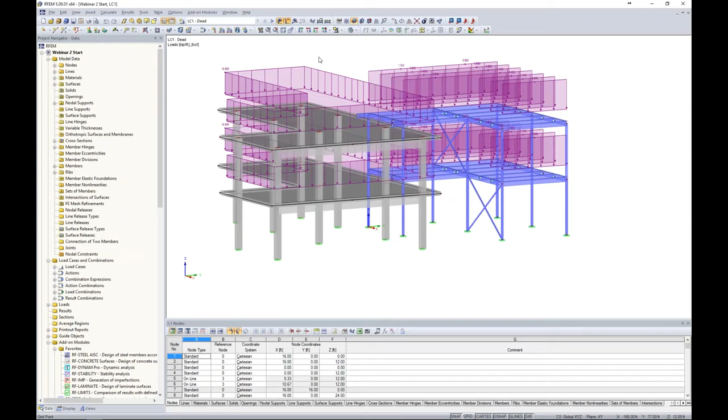Previously we loaded the structure, ran our load combinations, and got a full analysis. Now that isn't always the case. Sometimes we go to run an analysis after loading our structure, and for example, we have loaded our structure with dead load here. Previously everything ran great, but as we know with any finite element software, that doesn't always happen. So when we go to run this first load case, running according to a linear analysis as we know from RFEM Webinar 1, we immediately get an instability. Instabilities are nothing new despite what program you're using, but I want to show you these features that make our lives a little bit easier within RFEM.

The first thing to know is the text about the specific instability. It says this model is unstable. The instability is found at FE node number 64, direction Z. So it immediately gives me a location and tells me that there's some type of issue in the global vertical direction.

The model is statically underdetermined. So when I close out of this error message, you'll see that my big red arrows show me exactly where FE node number 64 occurs.

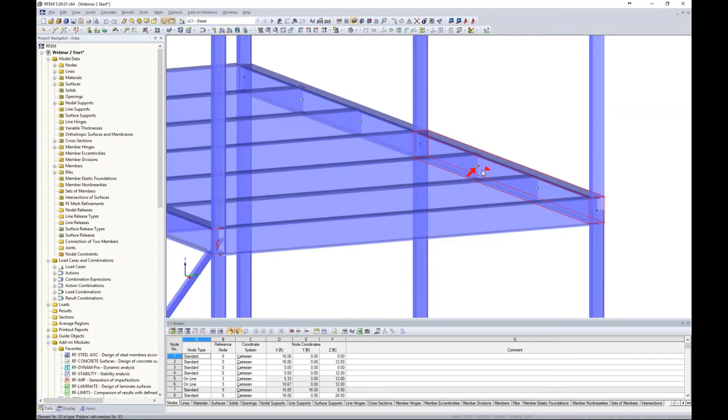I'm not going to say that 100% of the time this big red arrow points out our issue, but a lot of the time this really is where it's occurring. When I scroll in here, I don't see anything immediately. When I turn it to a wireframe model, I can zoom in and see that I forgot to connect my node of my beam to my transverse beam. Well, that's no problem at all. I can just drag and drop to connect those two members.

So you can imagine that when we have a huge model with a lot of members and we get this error message for an instability, that red arrow is a huge benefit to narrow down where that issue is occurring rather than hunting for a needle in a haystack trying to determine if a node isn't connected someplace. Now we can go and run our load combination again, or this particular load case.

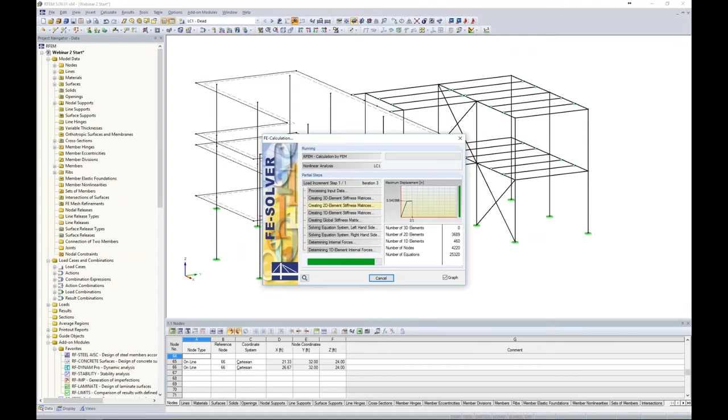We run it. Everything appears to run okay this time. We immediately get our deflections here, which we can decrease the deformation factor for. That's great, but now we need to run our first load combination, 1.4 dead load.

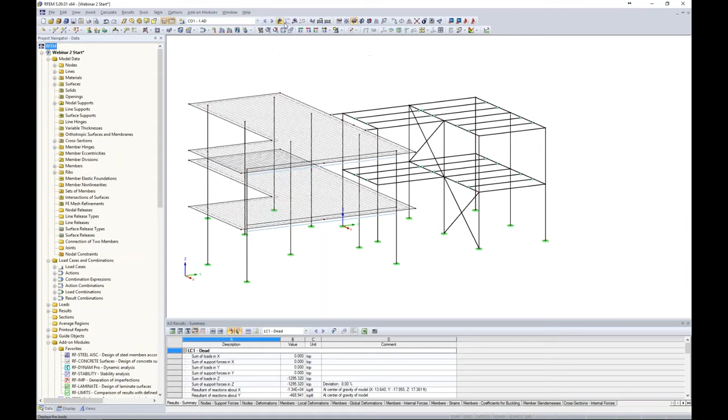This is just a load combination from the ASCE 7. I take a look at my applied loads - it's applying that 1.4 factor to all of my dead loads, our surface loads and line loads here. Turning this back into the rendered view, I begin my first load combination analysis.

And lo and behold, we get another error message - another instability, but this time the text is a little different. It says our model is unstable and the instability is found at this location, direction X. So we have a different direction being affected now. But it also says a specified load is greater than the critical load, which tells me that at this location I probably have some type of buckling issue because the specified load exceeds the critical load.

I can close out of this error message and zoom into this big red arrow here. Maybe I turn this into wireframe - I see that everything is connecting fine. So I don't really understand where this error message could be coming from.

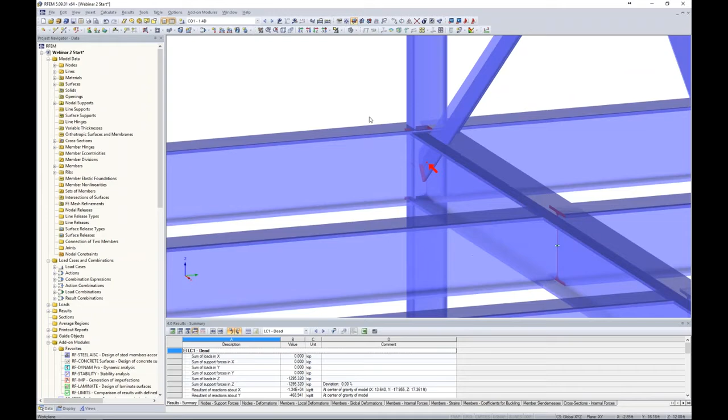This is where we can utilize our add-on module RF Stability. From our long list of add-on modules over here on the left in our project navigator, we can launch RF Stability. This is a simple dialog box that pops up within the program, and it allows us to do an eigenvalue analysis for a few different eigenvalues based on the buckling behavior of our structure. What we can do is import different axial forces from either load cases or combinations.

Now, because I was able to solve for my first load case, dead load, just fine, it makes sense to import those axial loads to see how the structure behaves based on those applied axial forces. We have quite a few other settings here that I won't get into in too much detail, but we do have an option to calculate an eigenvector for an unstable model - this is if I couldn't get the model to solve at all, so the causes of the instability can be checked graphically. This is a feature too if we couldn't even get our dead load to solve.

Now for this, I will run the calculation and it quickly runs the different 4 eigenvalues. I'll now see my results available in my tables here. You'll see I have 2 different columns - the first is the critical load factor.

The critical load factor is just a factor that I can multiply that applied dead load by before I'm going to see the associated buckling behavior. We have 4 different eigenvalues, so the critical load factors are listed here in ascending order, so probably our most important one would be this first eigenvalue. Now the magnification factor is just a relationship between the moments of a linear static analysis and a second order analysis - essentially my first order moment times my magnification factor gives me my second order moment. But now we're a little more concerned with this critical load factor.

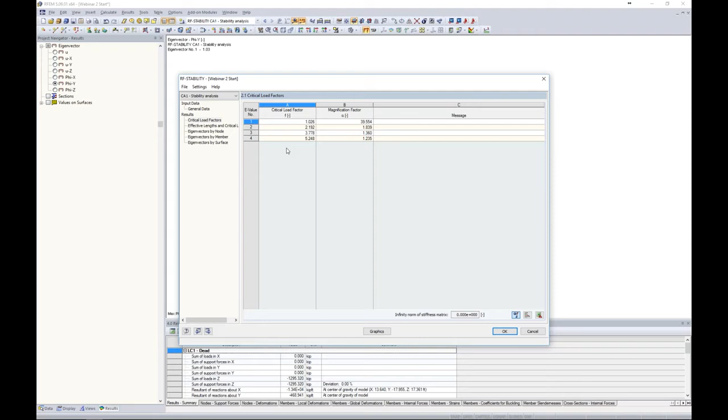So if we take a look at my graphics, we're still in this add-on module RF Stability. We can see with our drop-down box here I have my four different eigenvectors. Looking at the first eigenvector, we can see the buckling behavior of this structure.

Remember, I can only multiply my dead loads by 1.03 before I'm seeing this type of behavior. If I take a look at the other eigenvectors, it's the same type of behavior. It all has to do with these slender columns here. So when I multiply my dead load by 1.03, I see this buckling behavior, and when I try to run 1.4 times my dead load, that's where our instability is coming from. These members simply can't handle the applied loads.

Back under my Data tab, at the very top is all of my input data. I can take a look at my cross sections, maybe turn off my results here from RF Stability. I click on my first defined cross section - it's a W6x9, a very small number. So perhaps I want to increase that to something a little larger.

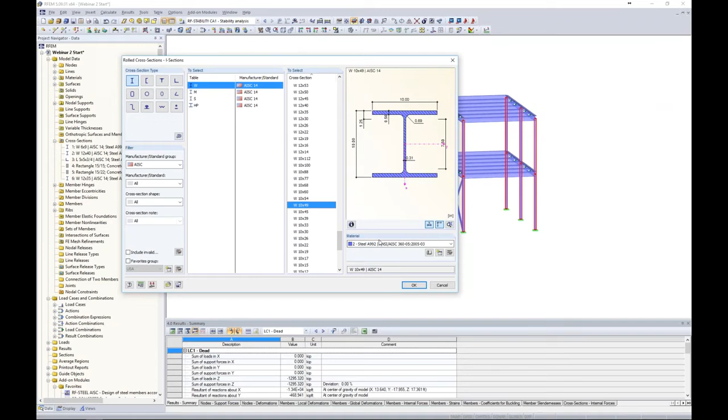I can right click and edit all of these cross sections at once because they're assigned to a single cross section within the program. I open up my cross-section database, and here are all of my AISC shapes. We'd like to choose something more like a W10x49, much bigger than a 6x9. A992 is still okay, but obviously we're going to have a bigger cross-section here. I click OK, and it's asking me to clear my results.

So now when we go to run our 1.4 dead load and run the analysis, everything should run fine because now we have a sturdier member and we don't see that same buckling behavior. You can see how RF Stability is extremely useful, not just if you have an instability, but if you want to see the different buckling modes of your structure. I did a few other webinars where I utilized RF Stability to export imperfections as well.

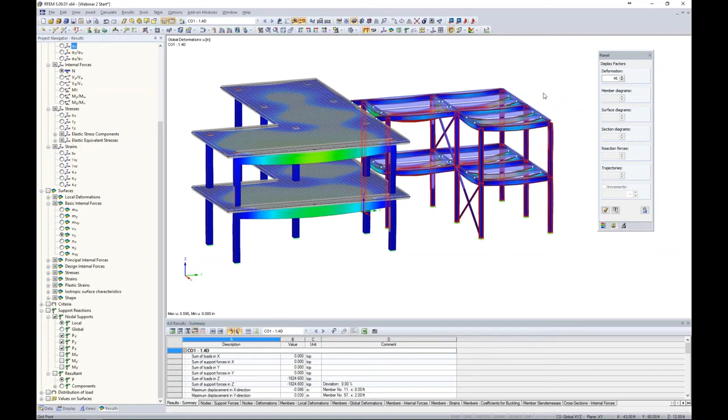Okay, so now that we've addressed instabilities, I'd like to move on to singularities. The first thing to do is turn off our results, and let's take a look at the top surface of our concrete structure. If I drag my selection box over that top surface, I can use my drop-down box here to create a visibility by selected objects.

You can always right-click and show the hidden objects in the background if you'd like, or right-click and turn that off so we get a clean view of only the structure we've selected. Under Views, I can create a new visibility, and we'll call this Top Slab. I click OK, so now I have this user-defined view under Views that I can always refer to, no matter what view I'm currently in.

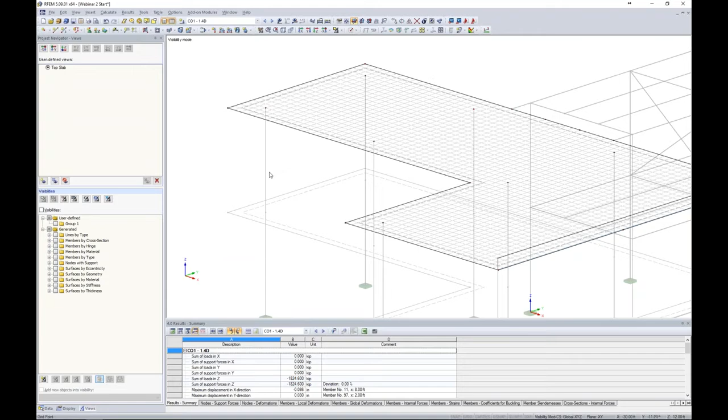So this is the case when we show the hidden objects in the background and show a wireframe view: members are always 1D elements in a finite element software, while our surfaces are 2D elements. The problem is that where we intersect this column to the 2D surface, the intersection occurs at this tiny FE mesh element, a single node point. So we can imagine that all of our force transfer is occurring at this single point.

Inevitably we're going to get very high stresses and very high forces. If we go to design this concrete slab, we're going to get high reinforcement simply because it's a product of the high internal forces at this location. In reality, when we render this, these columns are 15 inches by 15 inches, so we are going to get some load distribution. This isn't just for RFEM, it's common in any finite element software. So what tools do we have in RFEM to help us address this so we're not overly designing our structure?

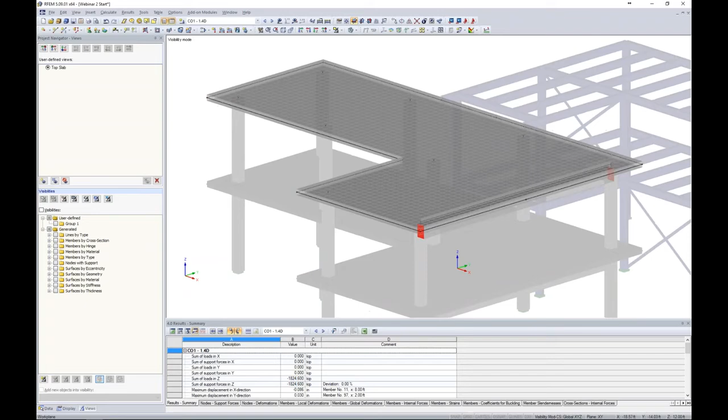The first thing I'm going to do is jump to a different model here that I have saved, where I've already used our add-on module RF Concrete Surfaces to do my reinforcement design. Now I have an entire hour-long webinar dedicated to just surface design using this add-on module, so we won't get into it today. But again, if you're interested in how we can do reinforcement design for this, refer to that YouTube video.

So once we run our analysis in RF Concrete Surfaces to get design per the ACI, we have our different required reinforcement. The first is AS1 in the top direction. Judging by this red arrow, we can see the reinforcement direction, and you'll notice that where these columns are framing into the slab, we have high reinforcement given there. The same goes for AS2 in the other direction.

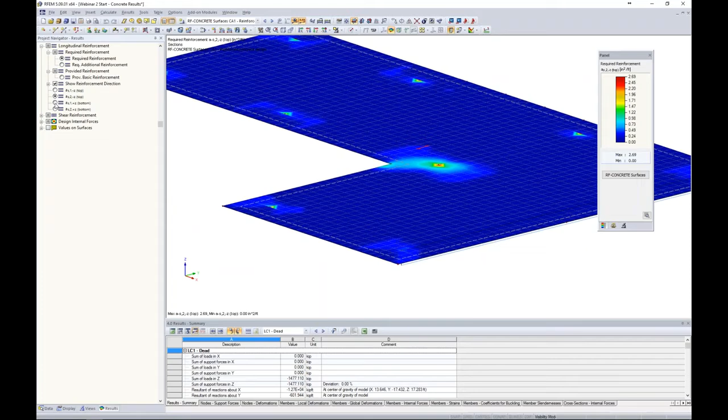Now, when we're looking at AS1 at the bottom, it's not the same, which makes sense. We have a lot of bending at the bottom of our slab between our columns, so that's where most of our bottom reinforcement is going to be. Same with AS2 at the bottom in the other direction.

Now, focusing on AS1 top for our slab with this particular reinforcement design, this is nice in terms of our contours, but perhaps we'd like to see this in a more numerical value. Well, we can do so with sections, and what we will do with our first section is up here in our dropdown, we can create a new section numerically.

But before I do that, right next to it, we have the option to completely turn off our ISO lines. So these results will still be available, but I'm just simply turning off those ISO lines for the sake of making my section cut right down through the center of my slab. So a section is exactly what you would think of it. It's going to give me the internal forces or my results at that particular location. So we can create this section numerically.

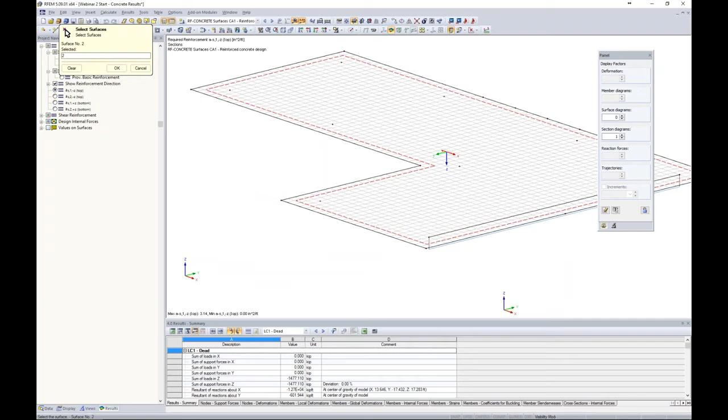Now, the first thing I need to do is to give it a section name, section 1. It will be a section cut through my surface, and I can apply this to my single surface number 2 here by clicking on that graphically. The next thing to define is my start and end points for the section.

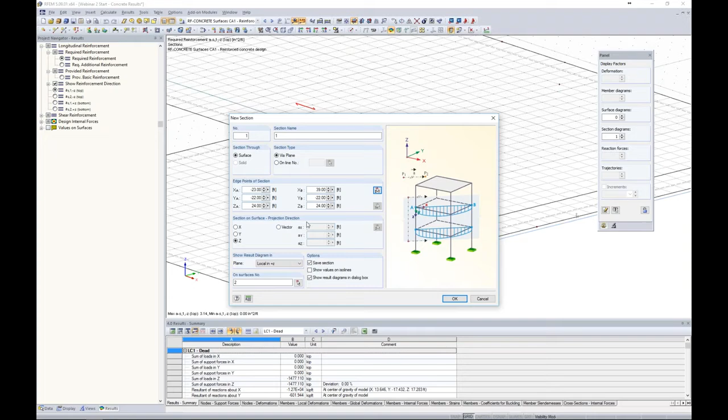So what I like to do is maybe turn on my drawing grid down here, and I can activate that down at the bottom, change my origin for my drawing grid, and I can choose my 2 points here by zooming in, and I want it right down that column line. So my second point will just be located at the second end of my slab, and because of those AutoCAD-like features, the program does a great job of just snapping to those points that I most likely would want to place my section. Now, the section on surface, the projection direction, we can have it in the global X, Y, or Z orientation, or we can define our own vector if we want it at some type of angle.

Once I click OK, then it immediately brings me into the results diagram for my section, and you'll see our exact same results that we were viewing in RFEM, and in particular, we take a look at our reinforcement design per RF Concrete Surfaces. Here are those spikes in reinforcement where our columns are framing into our surface. I think we can easily say that this is being over-designed for those internal forces.

Now, I can always exit out of here and view these surfaces, as you can see graphically on my surface as well. So going back to the results diagram by right-clicking, I want to show you guys a useful feature called smoothing ranges. Up at the top is the option to edit our smoothing ranges.

Now, my first column occurs 3 feet from the edge of the slab. My second column occurs at 20 feet from the edge of the slab, and my third at 41 feet. So what I'd like to do is smooth out the range, 1 foot on either side of the column for a 2-foot range there. So this is to account for the load distribution that's occurring when in reality the program's not accounting for that.

So what we can do is define our different ranges. For example, for our first column, the beginning will be 2 feet and the end will be 4 feet. The program automatically calculates the length as a total of 2 feet for that first smoothing range. The second will be from 19 feet to 21 feet. And lastly, for our third column, it will be from 40 to 42 feet.

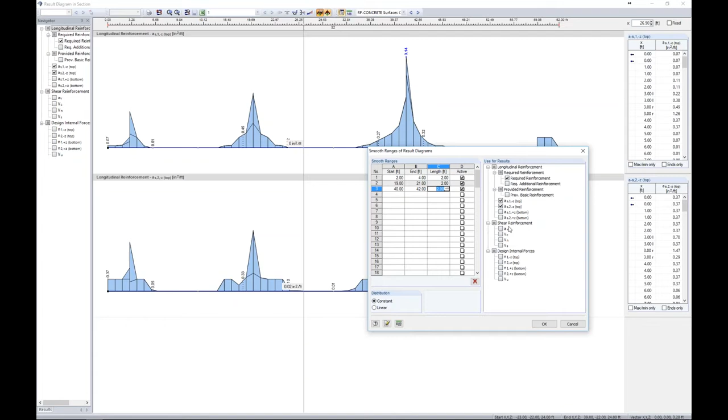The program automatically assumes that we'd like to apply these smoothing ranges to what we're currently looking at, but we can always activate and deactivate different results available here. So now when I click OK, you can see the smoothing range applied.

For example, column number 3, we went from 3.14 inches squared per foot to 1.65 inches squared per foot. So extremely useful in the sense that we can print this to our printout report.

We can even use this drop-down box here and pull up one of our other load combinations. I'm going to clear out all of these result diagrams and just activate my MX and MY. Again, we're seeing those spikes in internal forces here. I can go back to my smoothing ranges and simply activate the checkbox for MX and MY for all 3 of these ranges.

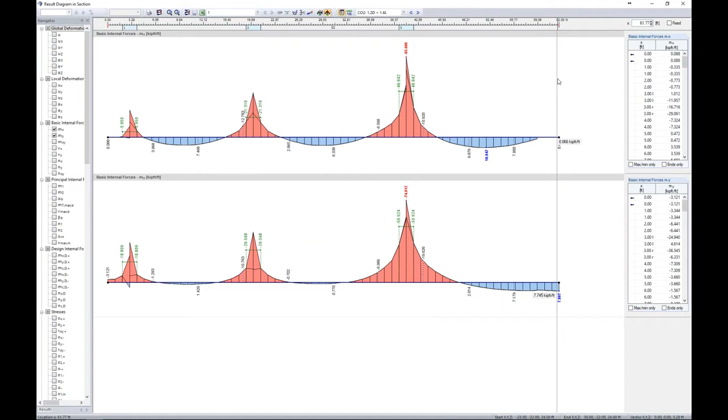So now when I click OK, you're going to see the smoothing range applied here as well. Now, one thing to note, if we jump back to RF concrete surfaces, for example, the smoothing ranges are shown here, but if I were to exit out, they are not shown graphically here within the model.

So the question is, that's great, but how can we apply this so that the program actually designs for those average forces rather than us just putting a fictitious number after our results are shown in the smoothing ranges? One thing I forgot to mention, if we take this section cut and highlight it, we hold down our control key, maybe we want to copy it down this other column line to give us some perspective on some high design forces as well at this location.

So smoothing ranges are great, but if we go back to our data tab, we will see these sections available here. We have section 1 that we just created, and here's our second copied section. There's another feature called average regions.

So if I right click, I can create a new average region. Now for this, we want to apply it to a particular surface, so I graphically select surface number 2 here. You'll notice that I have 3 different forms I can select for my average region: a rectangle, a circle, or an ellipse.

For our particular case, our columns are rectangular in shape, so it's probably most beneficial to use a rectangular averaging region. But maybe you have a circular column framing into this slab, so that can be utilized as well.

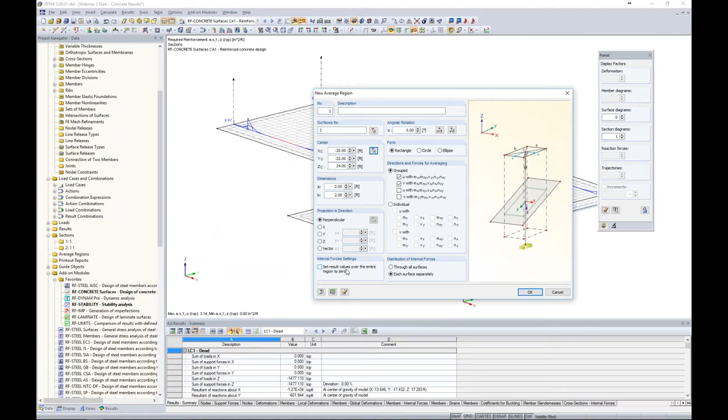The internal force settings, you even have the ability to set all the result values over the entire region to 0. This might be beneficial if we're checking punching shear for a column and we're really interested in the shear at the critical shear section, and we don't want to design for anything within that critical shear section. So if we click OK, then we will get our first average region.

Now, to make this very clear what we're doing, I'm going to jump to one of these particular load combinations, and under my results, I'm going to activate my sections. So we're still viewing our sections here, but for my MX forces. So this isn't my concrete design now, this is my internal forces MX.

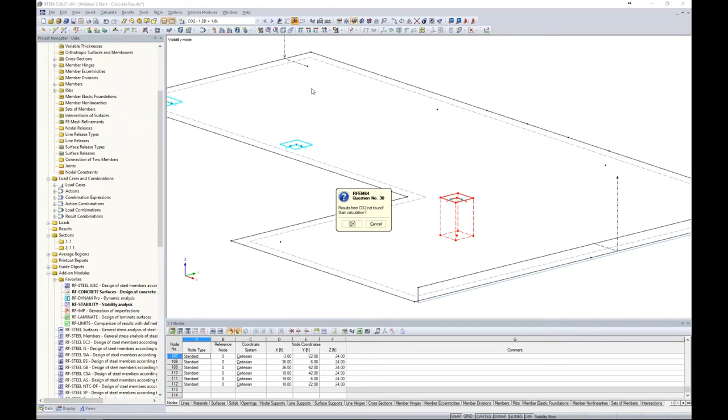Now with this average region, all I have to do is select it, hold down my control key, and then I can take it, drag it, and drop it. It's asking me to clear my results, that's fine, and drag and drop it to some other regions here. Now I can rerun that same load combination rather quickly here, and we will see that average region now apply.

Now previously this was something like 83 kips per foot, so you can understand that this is now going to give us less internal forces.

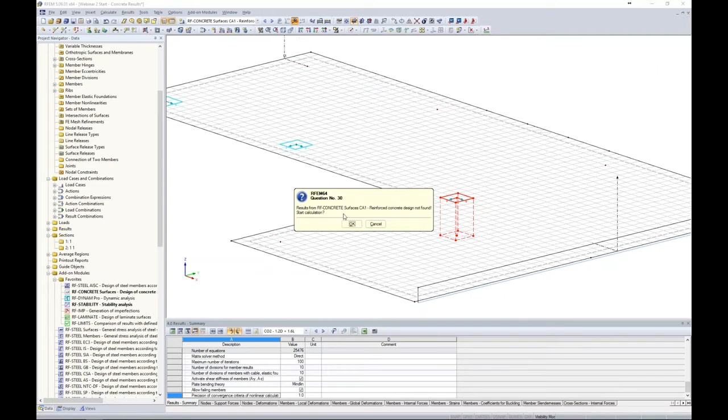Now if we jump back to RF concrete surfaces, it looks like we lost our results here, so I'm just going to quickly rerun that. All this is doing is applying the ultimate limit state designs for all my load combinations to do my reinforcement design. But what I want to show you with these average regions is that my AS1 top is still showing 3.14 inches squared per foot, so this average region did absolutely nothing to help us.

So why is that? Well, back under the Data tab, under the Concrete Surfaces add-on module—if you want a more detailed look into this particular add-on module, refer to our previously recorded webinar—but to let you know, when you are using average regions for concrete design, under the Details tab, it is default to have this option checked off.

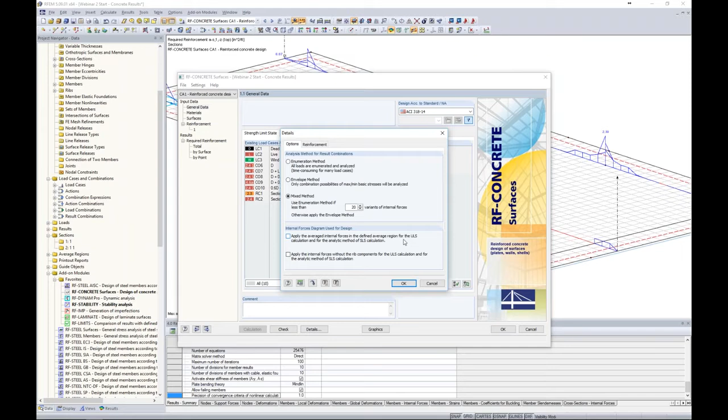What we'd like to do is apply the average internal forces for our ultimate and serviceability limit state designs, so now we want to check this checkbox. I click OK, I click OK. We've lost our results again, but we can easily run a quick analysis, which solves rather quickly, because now it's taking those average internal forces to give us our reinforcement design. So now we have gone from 3.14 to 1.83. This is how we can apply those average regions to address singularities within the program, especially for something like concrete design.

Okay, so that is what I wanted to look at in terms of singularities.

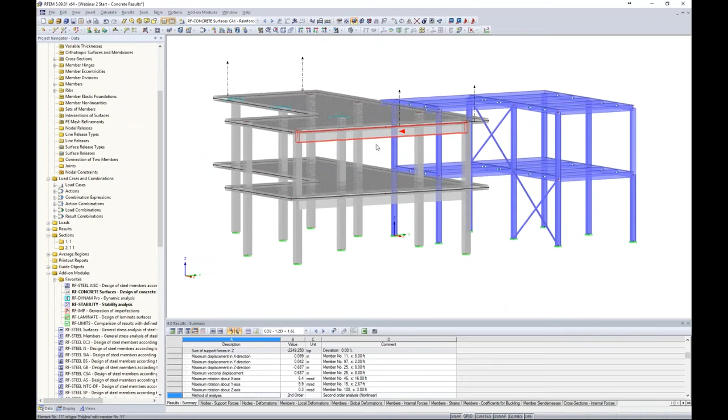Now, switching topics, I'm going to cancel my visibility mode here and render my model. In RFEM Webinar 1, if you can remember, we created this beam member here, and it's actually a rib because we wanted to span from this column to this column, but we didn't have an intermediate column, so we thought it'd be best to apply a rib member there. If I double click on this rib member, you can see the member type is set to that. Previously we had defined effective widths for this rib member to take that into account for analysis, but also designed for our reinforcement per the ACI.

Now, let's say we have a situation where we actually have a precast element, and the precast slab is sitting on this precast beam. It's not a monolithic pour like what we'd see with a rib type member, but in reality I want to fully release the moment. Maybe I still have resistance for lateral and vertical movement, so X, Y, and Z are fixed, but no moment will be transferred between the two. So what I'd like to do is not have this set as a rib, but set it to a beam member. When I click OK, it asks me to clear my results.

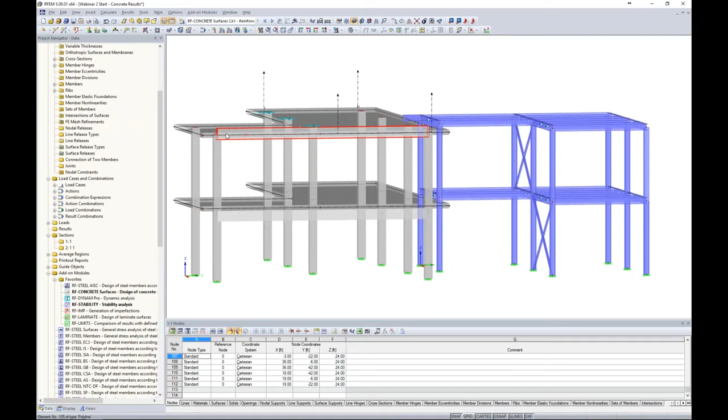My typical member is modeled directly at the center line, the same center line as the slab. But in reality, what I'd like to do is still drop this beam down below the surface. So how can I apply an eccentricity?

If I double click this member, we have a tab here called Options, and that's where you'll see member eccentricity. Now we need to define a new member eccentricity. You'll see here that we have not only the local axis system X, Y, and Z for a member, we can also set it according to the global X, Y, and Z. The local might come in handy because if we are modeling a member at an angle, then obviously we want to apply the eccentricity according to the local axes rather than the global.

Now we can also apply this movement of the beam in the X, Y, and Z, so not necessarily just vertical eccentricities, but left and right too. Typically with this situation, I would need to understand, well, what's half the depth of my slab, what's half the depth of my beam, add those together, and I can manually apply my eccentricity. But we have automatic features in the program that can do all of that for us. You can see here that I have six different options of where I can select my beam to be, for the eccentricity to be applied to. This little red dot highlights exactly which option I've selected here.

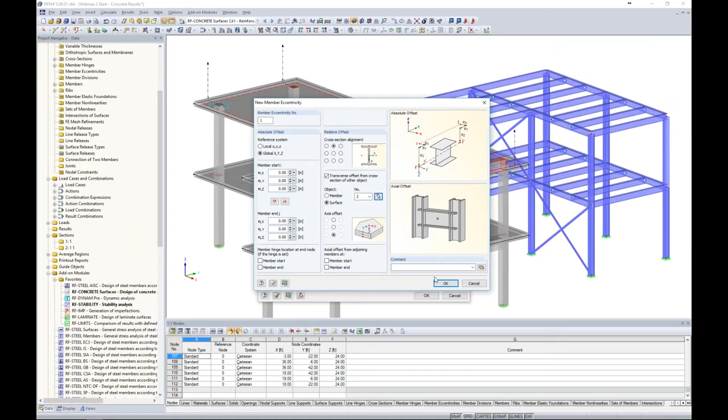So I'd like the top of my beam, and I want to offset it according to a surface. Then I can graphically select my surface number 2 here, and I want to offset it from the bottom of that slab. Now when I click OK through all these dialog boxes, we can see that beam was dropped down below the bottom of the slab. This is the same concept as the rib member, but now we're not taking into account that effective width.

One thing I'd like to do, and I created this user-defined view here of my top slab, let's render it again. What's going on behind the scenes, if we turn this into wireframe, is the program has dropped this member down below the slab depth, and it's applying little rigid links at every FE element along the member length. These rigid links have full fixity to transfer moment, shear, and axial forces, but remember, we're trying to alleviate these moment forces being transferred from the slab to the beam, causing high torsion within the beam.

So how can we automatically do this without modeling individually these little rigid links, what we may have to typically do? Well, in the program, we have a feature under data, and if I scroll up to my input data here, you'll see a line release.

So what I can do is right-click to apply a new line release. The first thing the program asks me to do is define the line, and I will apply the line that I used to create the member. If I try to click the member itself, it doesn't allow me to do that, because in reality that's not where the member was modeled—it was applied to this line integrated within the surface. Then we create a line release type.

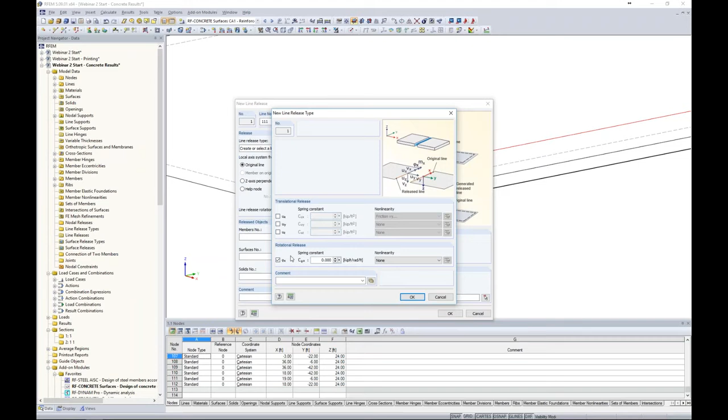Keep in mind that these are the local axes of the original line. Surfaces have their own local axes, our beam has its own local axes, and so do our lines. So we're not releasing any of the translation or rotation directions of the beam or surface, but rather the line itself. We're going to completely release this rotational release, phi x here, and we can click OK.

We do need to define which is the released object. We'll apply this to our surface number 2 again, press OK, and we'll see the setting within the program that shows us we have some type of line release here, judging by this blue symbol.

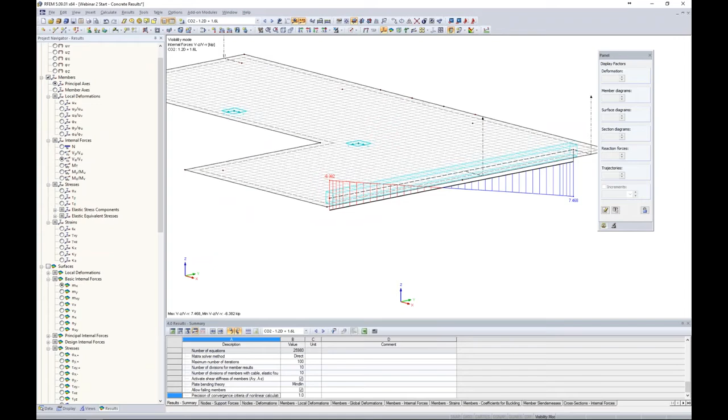So now if I were to run one of my applied load combinations, such as 1.2 dead, 1.6 live, we can run this load combination. Again, we're just viewing our initial view here, and I'm going to turn off my surfaces. We just want to take a look at our member design, so I'm going to turn off my sections.

Rather, we're taking a look at our members and our internal forces for torsion. You can see here that we still have a small amount of torsion along the member length of 1.933 kips per foot. But what would this look like had we not released that particular moment along the member length?

So this is how we can effectively apply line releases in the program, if for example we did not want to connect our surface to our beam element.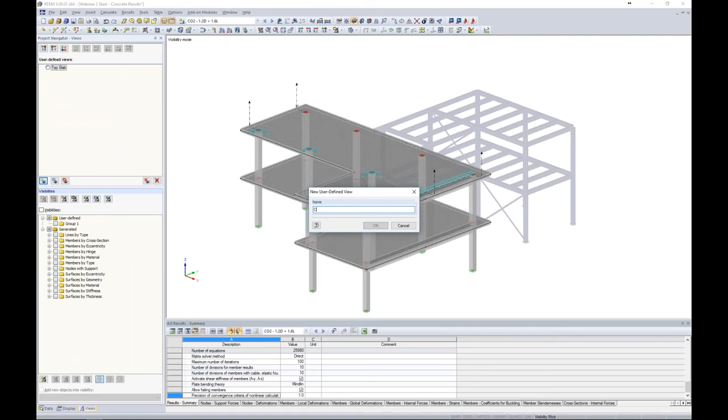So under my views, I can create this new user-defined view. We'll call this one concrete structure only. I click OK. And I'm going to turn back on my grid and redefine the origin at the base of my structure.

I'm going to hold down my control key to select these two members, and once again holding down my control key, I'm going to copy these, drag and drop them to a location parallel to the concrete structure.

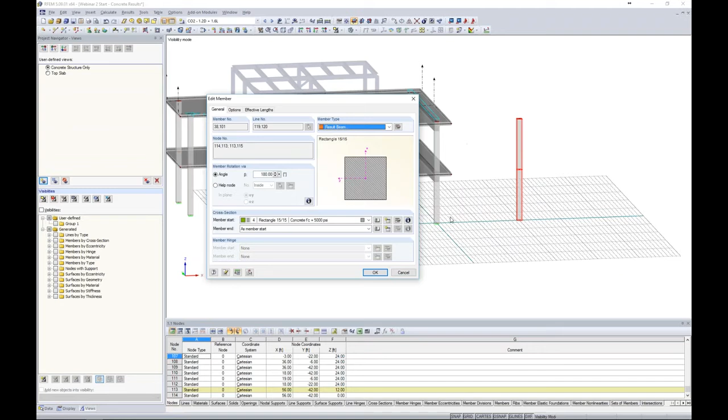So what I'd like to do from here is select these two members, right-click to edit them. Under the member type is where we can choose result beam. A result beam simply takes the information from other objects in the model and applies it so that we can view the analysis results as a member internal force.

Result beams don't add to the stiffness of our structure. We're not applying them to an analysis, it's just simply a different way to view our results. As far as a cross section, it doesn't matter if it's concrete, steel, aluminum, or your own user-defined section - you can choose anything here. You'll also notice I don't even need to put a support at the base of this column section. What I need to do here is define some additional information.

As far as result beams, we have four different options. The first is within a cuboid quadratic. This uses a quadratic integration area where the centroid of all the elements I'm trying to incorporate within this result beam needs to be located within the member's axis - meaning the axes of our actual result beam shown here.

I'm not going to use this option today, but we will be using this second option as our example - within a cuboid general. This will apply a rectangular integration area where the centroid can vary according to the local axes of our member.

The third option is within a cylinder, which uses a circular integration area where the centroid must be located at the member's axis - again clarified here with this nice picture. The last option is to choose from listed including objects.

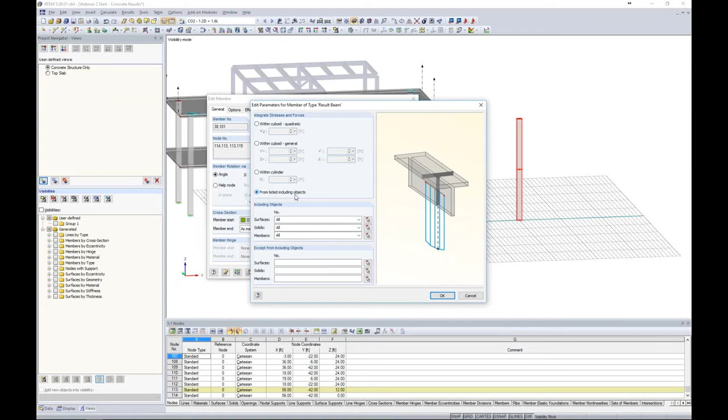So here is where I'm going to start my first example of a result beam. I want to select my surfaces to apply to this result beam, so I can just highlight everything. My steel is in the background, but since it's not selected, I don't have to worry about it. As far as solids, we don't have any, so we can leave this as all or none. For members, we want to graphically select all of our concrete members here.

I click OK. We can even exclude any objects from our selection if we'd like to here. I click OK, I click OK.

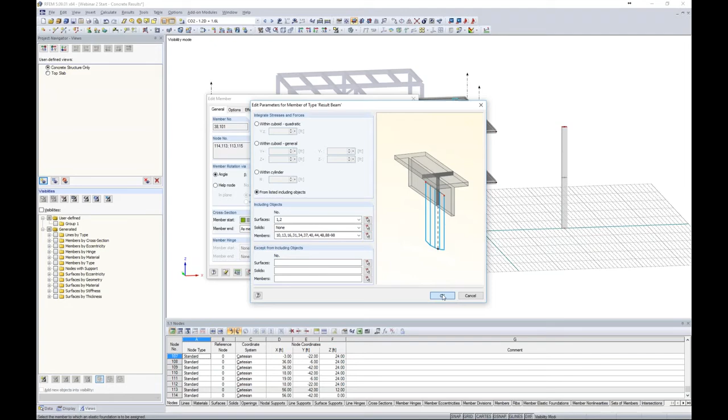Now I'm going to run one of our load combinations where I have a lateral load applied. You'll remember from webinar 1, we applied a wind load in the Y direction with some gravity loads. If I run this first load combination, you'll notice that after the result is complete, I have my member over here with some results as well. So what's happening? I want to view my results on my members like I would any other member within the model.

What this is doing is incorporating all of my objects here and applying it to my result beam. Just to summarize what's going on: as far as viewing my shear forces in the Y direction, this is the local Y direction, so I can always right click and turn my local axes of my members on to understand exactly which direction I'm looking at here.

The local Y is going to give us my story shear information. For example, the top story is going to be 10.46 kips for this particular load combination. My first story shear is going to be 39 minus the 10, and finally I have my base shear given here at 48 kips. If we take a look at our shear in the other direction, we hardly have any forces at all. That's just because we haven't applied any lateral loads to this.

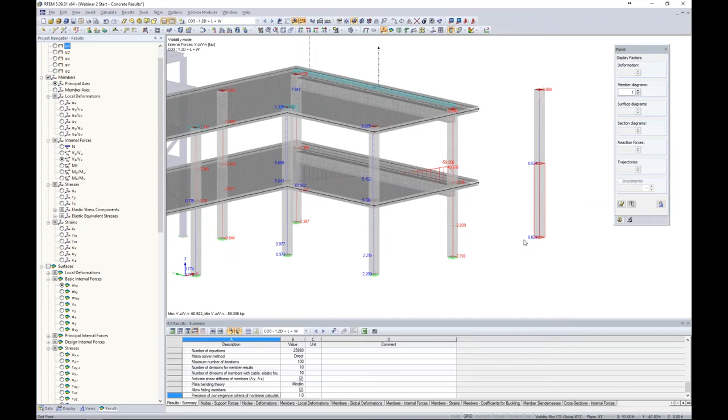Now lastly, we can take a look at our axial loads. Why would our axial loads be important? Well, if we're interested in our sum of forces, I can see that for my concrete structure only, my sum of forces in my Z direction is 1,455 kips. This is different from my table down here shown in my results summary, which also gives the sum of the loads in the Z direction, but this is for the entire structure, including the steel structure over here. So again, result beam would be beneficial for only part of your structure here.

Now, the moments are not applicable in this case, and that's because we have moved the members of this result beam away from the centroid of the objects that we're interested in. So just keep that in mind when we're looking at something like moments, we can't get an accurate representation here. I'll show you in just a minute how we can do so.

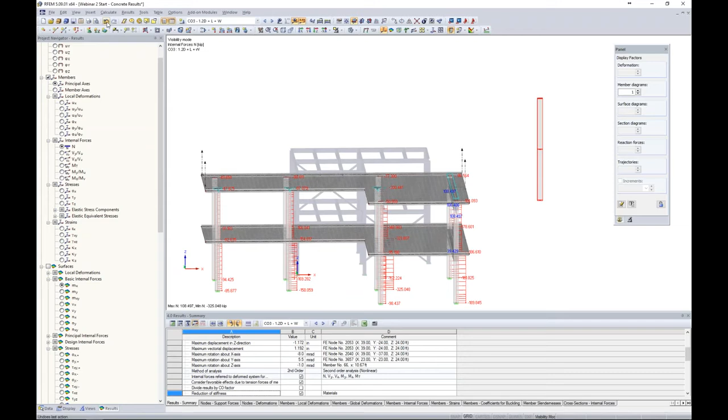Now, as we just saw with the axial and shear forces, the parallel distance from the centroid does not matter. So going back to RFEM, I can move this result beam every which way in the left and right direction. But if you take a look at what happens when I simply move it in the vertical direction, those results are now gone. That's because I did not move it in a parallel direction to the objects that I'm interested in. So that's the one way you need to make sure you're able to see your results accurately for your structures, to make sure it is parallel.

Going back to the PowerPoint, now our moments, which I just mentioned — torsion, strong and weak axis bending — the beam must be placed at the centroid. So let's move on to a quick second example with our result beams of how we can utilize this to view our moments. For example, if I'm interested in my top slab here, which we can go back to our user-defined views, I really want to design a 4-foot wide section here on my slab, and I want to pull those internal forces from that 4-foot wide section.

Well, a section cut isn't going to work here because a section cut only gives me my internal forces at that exact location, exactly what it is — it's a cut. So in order to utilize a 4-foot section and pull those internal forces, we want to use a result beam. So what we can do is create a new beam member here, and instead of the member type beam, we will choose result beam.

Again, the cross section does not matter. We could choose anything we like because we're not contributing to the stiffness of the structure in any way. We want to move on to the details of this result beam, and this time I want to choose within a cuboid. If I'm interested in a 4-foot section, that means 2 feet on either side of my result beam, laid out clearly in this picture. The vertical direction isn't as important since I don't have members modeled above or below, only this slab, so 1 foot is more than enough. But if any elements were within this 2-foot vertical section, they would also be included in my results, so keep that in mind. This list is no longer relevant because I'm using only this section up here.

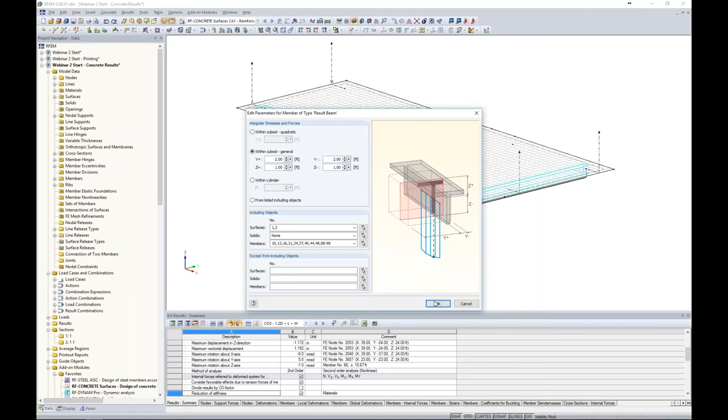So when I click OK, I can begin modeling my new member. I will snap to the middle point of this line to make my result beam section right down the middle of this slab. You can see the program automatically snaps to the perpendicular section, just like in AutoCAD. And here is my result beam, so we can see that 4-foot wide section. We can even render this for a clearer view of what's going on.

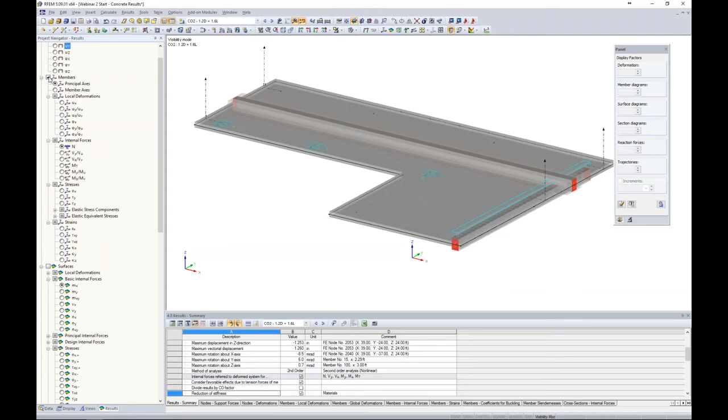Now let's take a look at our results. I'll run one of my load cases here, it doesn't matter, 1.2 dead, 1.6 live. I'm going to run the analysis. As far as our result beams, we can view them as we would any other member, as I mentioned before. The first thing we want to do is take a look at our member internal forces, and perhaps we're interested in the moment.

Let me turn this to wireframe view. Now our moments have a nice smooth diagram for my beam member here. So what's going on with this results diagram? It's pretty choppy. Well, when you're using a result beam like this, under Calculate, Calculation Parameters, we want to change the number of divisions of our members for result diagrams. The default is set to 10.

Let's actually change this to something like 100. I click OK, and my results will inevitably be cleared. I quickly run this analysis again, and we'll see that our results look much better. So that can impact the way you're viewing your results. You want to make sure to increase those numbers of sections if you see any type of discontinuities like we saw with the beam before.

Now we can see that our moment diagram is displayed quite nicely here for our strong axis. Remember, these are the internal forces for our 4-foot wide section, and we can take these internal forces and go do our own design. We can take a look at the weak axis bending here. We can even take a look at axial and shear forces. These are all relevant within this particular section.

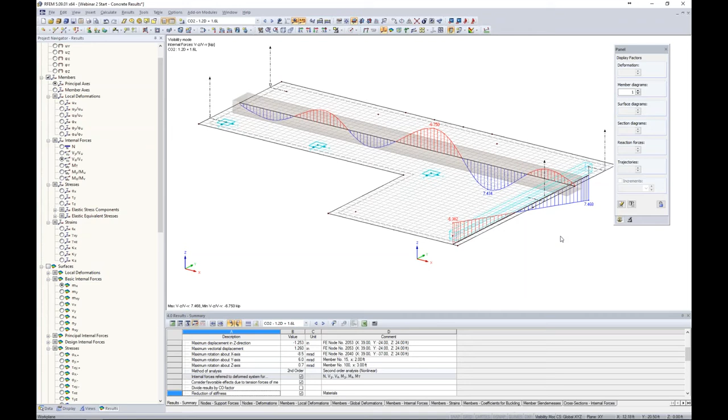But this is what I'm saying when you want to take a look at the internal forces or moments: the centroid of the elements we're interested in must be at the same location as our result beam's axes. Just something to keep in mind there.

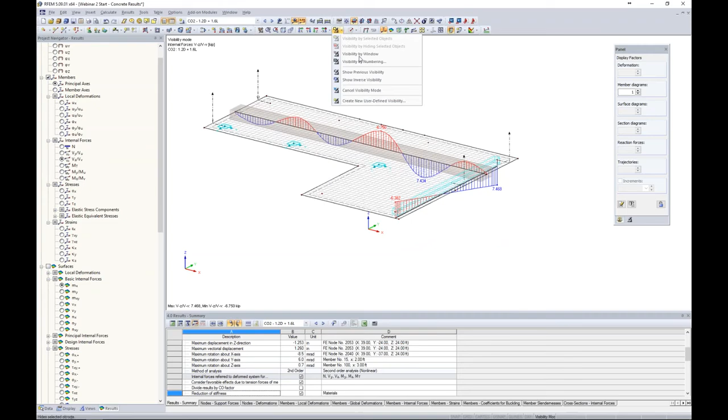Okay, so now that we've seen a bit more about result beams and focused heavily on our concrete structure, let's cancel this visibility mode to take a look at our entire structure. And I'm going to render it. Maybe I'm interested in the steel structure, and in particular I'll zoom in here and take a look at this connection. Now, this connection is pretty straightforward.

We have members framing in at 90 degrees, but if we didn't, let's say we had tapered members, or members framing in at a weird angle, this might flag us to think, okay, perhaps we'd like to do a finite element stress analysis for this connection. But if I turn this into a wireframe view, I cannot do a stress analysis of this connection because all of my members are 1D elements. So we can get stresses along the member length and the member as a whole, but not for this connection.

So what would we like to do about it? Well, the first thing to note is that this member, judging by this big red arrow shown here, the member end is framing into this node.

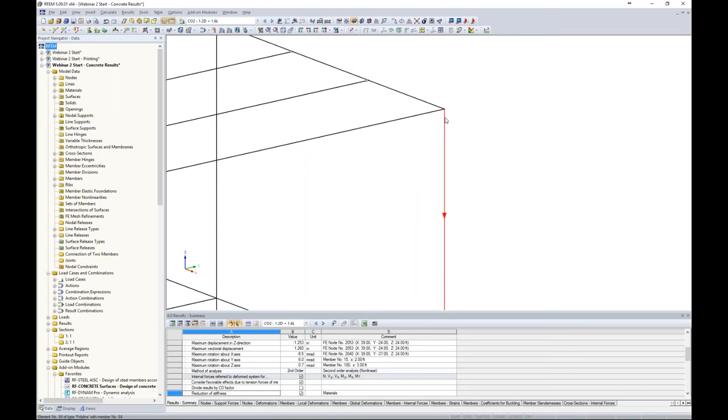The same with this member, but this third member's start is framing at that node. So what I can do is right-click to reverse the member orientation. Now all three of my members will be framing in at this single node.

I'm going to select them all, right-click, and choose to divide the member by a certain distance. Because I switched the member orientation, the member ends are all located at this particular node, so 3 feet from the member end is where I'm going to divide it. I've done nothing more than create smaller members out of my initial member length.

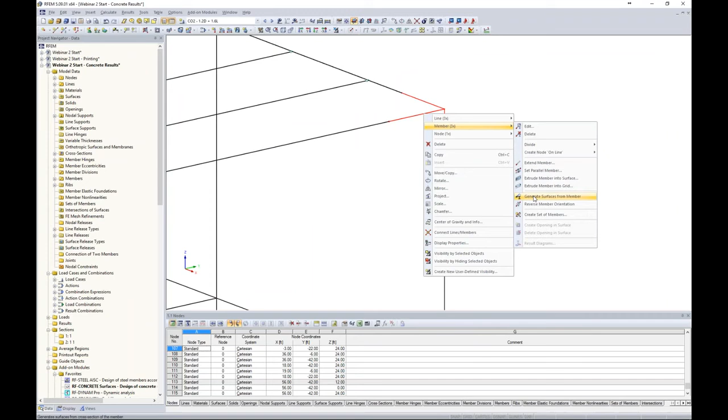If I render this, sure, we get this rendered view of our W section, but turning it back into wireframe view, I'm going to highlight all three of these members. I'll right-click, and under member, choose the option to generate surfaces from members. So now we've taken these 1D member elements and turned them into 2D surface elements, which will allow us to do a stress analysis on this particular connection.

Now, the first thing I want to do is under my display, turn off my FE mesh refinements. I'll get into this later.

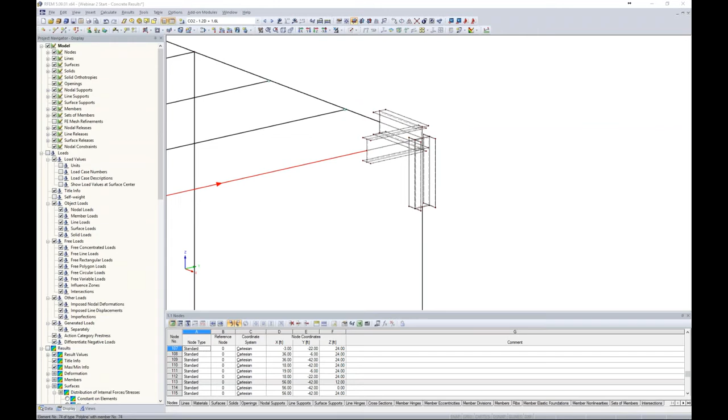First I wanted to mention that this W shape was previously a W12 by 35. This new W shape generated by the surfaces has all those exact properties. For example, the web surface here has a thickness of 0.31, taken from the W shape. All of my dimensions, materials, and thicknesses were taken from that member modeled previously, so I don't have to make any changes in regards to that.

What I do need to do is clean up the geometry a little bit before running my analysis. So I can highlight all of my members and create a new visibility by selected objects.

Maybe I want to show my hidden objects in the background. Now, this is a nice little trick even for users of RFEM who've been using the program for a while. If you didn't know, you can select one of these elements, and if you hold down Alt on the keyboard, that will allow you to rotate about those selected elements. Just a nice little feature to utilize there.

Now, to clean up the geometry, I'm going to start by deleting these center lines. They're no longer needed. You'll see that the column is a little bit low here, so what I'd like to do is extend this up a little bit above my beams.

I'll zoom in here and hold down my control key to select the 6 nodes that comprise the top of my column, and use my move tool. I'm only going to move this 0.58 feet in the Z direction, so 7 inches. I click OK, and now you can see the column was simply moved above those beams.

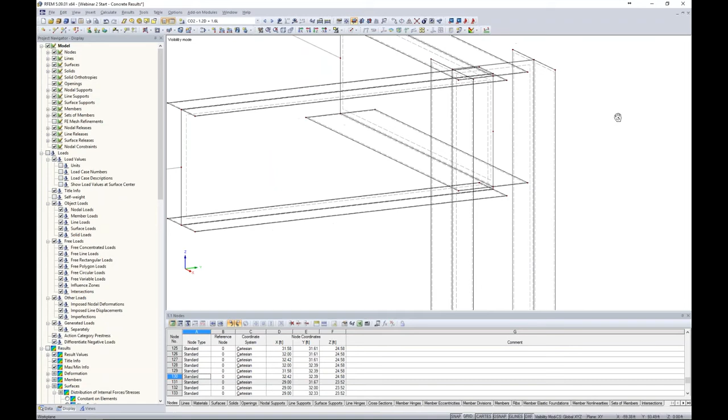Now the next thing is to move this beam here on our left to the face of the column. That's pretty easy. If we rotate our model and zoom in, I can again select these 3 nodes that entail the top of this beam and drag and drop them to the snap point of the face of that column. Those AutoCAD-like features allow us to snap to the most important parts of the model.

Again, I do the same thing for the bottom, simply snapping to that point, and now I can see that beam is framing in quite nicely to that column. If I take a look at my rendered view, we can see that here.

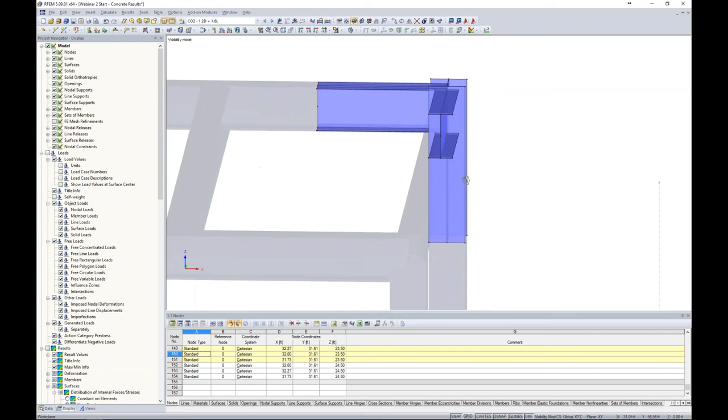Notice the rendered view of our 1D elements transitions quite nicely to those 2D surface elements. But with that said, if I look at my wireframe view, these 1D member elements are framing into this 2D surface element again at a single FE mesh point.

This is a singularity. By no means do we want to use an average region here, because in reality what's happening is this whole load from this 1D member element should be distributed to the entire face of this beam. So how do we distribute that load? That's where we can apply our little rigid plate here at the end of our member.

Now, under our surfaces in the drop-down box at the top, we can choose something such as a polygon. As far as the stiffness goes, I want to set this to rigid, so pretty high stiffness here, not infinite, but very, very high within the program. I click OK, and I can draw in this little rigid plate at the end of my member.

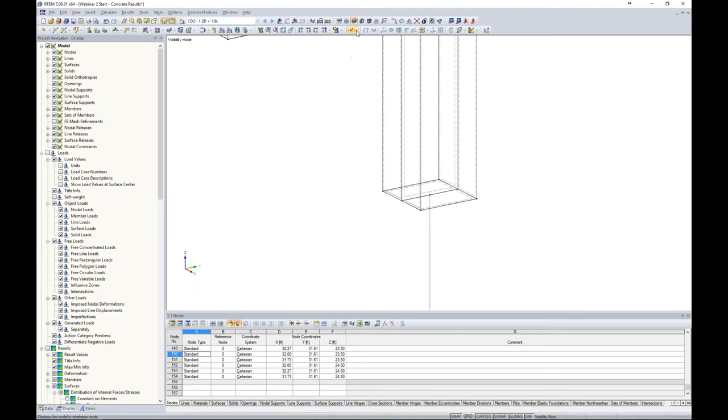Now that load will be distributed as such. The same goes for my other beam locations. If I don't take care to draw in this little rigid plate, I'm going to get singularity issues at all these other locations. So I'm just snapping to the 4 points of my column, and if I render this, I can see these plates are shown with the pink color, which shows me it's a different material.

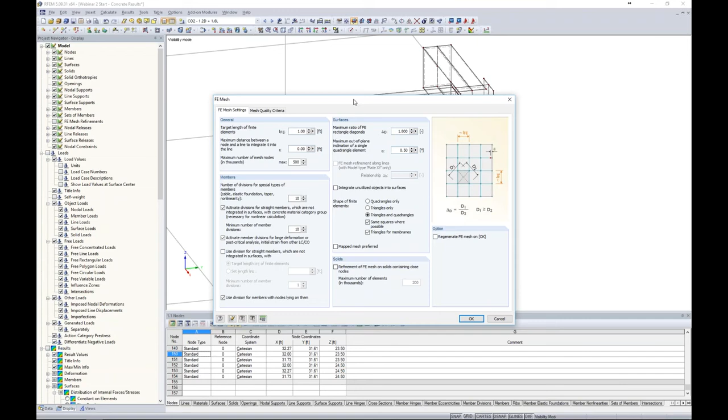Now, a couple other things to take care of before we're ready to run our analysis. Going back to wireframe view, under Calculate, FE mesh settings, we see that the global FE mesh settings are set at 1 foot. Sure, 1 foot is great for our huge slab element of our concrete structure, but when we're looking at something as small as this connection, 1 foot is not ideal. So rather than changing this global setting, when I made that transition to these 2D surface elements, the program actually put in these FE mesh refinements for me.

That's denoted by this little symbol here. If I double click on it, I can see that the FE mesh was defined for each individual surface with a target FE length of 1 inch.

This is more beneficial because if I were to apply 1 inch to my global settings, applying a 1 inch FE mesh to all my slab surfaces, my solve time is going to be much, much higher. The more FE mesh elements you have, the longer it's going to take to solve. So it's in your best interest to utilize these FE mesh refinements for situations such as these where it requires a smaller mesh here but not anywhere else within the model.

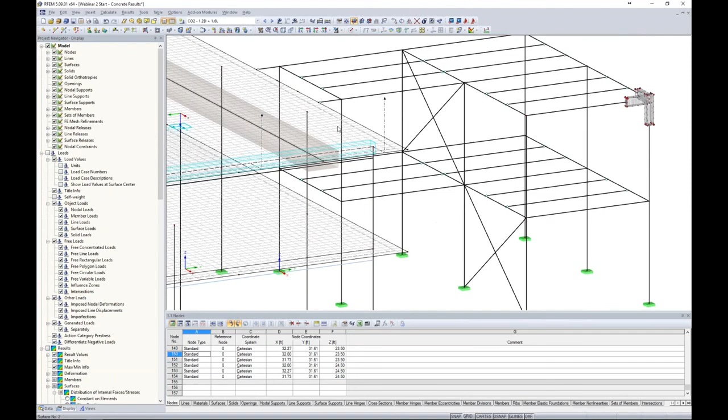Now when I go to Calculate, Generate FE Mesh, and let me cancel out of my visibility mode here, we can see the FE Mesh is automatically generated. Everything ties together quite nicely. I don't have to manually submesh anything here. But when I look at my concrete surface, I can see that the FE Mesh is still 1 foot, so that looks great.

Now, keep in mind, we can always apply our own FE mesh refinements. For example, maybe I have some critical points here where my beam is framing into my web, and I can hold down my control key to select 2 nodes. I can right-click to add an FE mesh refinement. So for this one, I create a new definition type, and we can see the node is automatically selected because the program knows that this is what we selected back in RFEM.

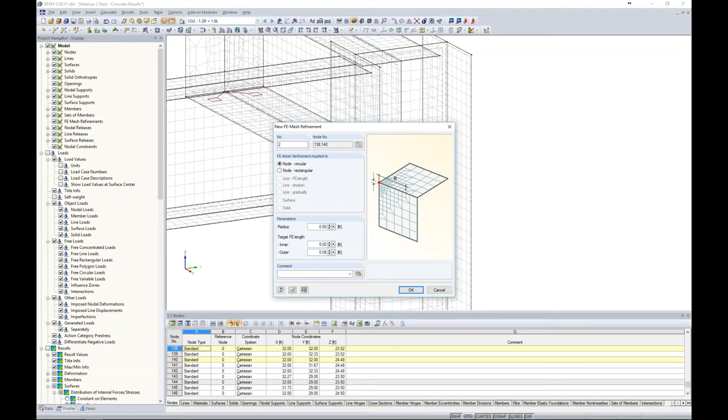We can give it a radius of 0.5 feet or 6 inches. Maybe our target length for the inner portion of the circle is 0.02, and the outer will transition back to that 1 inch of 0.08. I click OK, and now the program puts these symbols at those locations for my FE mesh refinement. I can go to Calculate, Generate FE mesh, and now we can see that the program has created this smaller mesh at this particular location, and it transitions nicely back into our surface mesh.

Under the Display tab, we can always turn off these FE mesh refinement symbols. The FE mesh refinement is still there, but we just don't need to necessarily see those big symbols.

So in regards to our connection type here, originally I modeled this structure so that it has a fully rigid connection of this beam framing into this column's web. But maybe I go back and decide, actually, I'm going to have some type of weld here, and this weld is not going to have a full moment transfer. So I want to relieve some of those moments within the beam framing into the column web here. So how do I apply that to this connection?

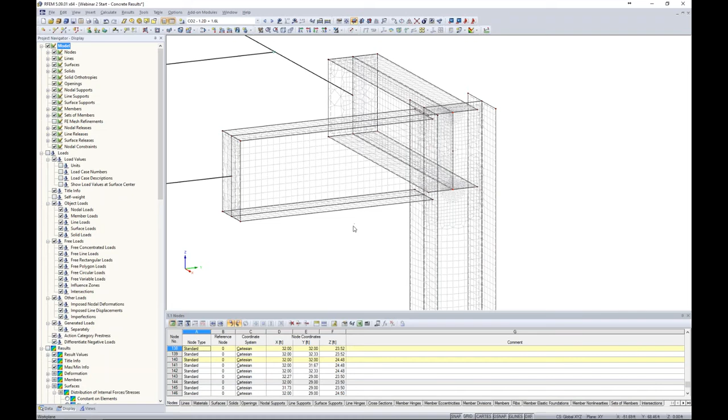Well, that's where we can utilize line releases again. So like I said, we're going to come back and apply line releases on a much smaller level here. Back under the Display tab, under Line Releases, we want to choose the option to assign a new line release graphically. Here, I don't want to override my previous line release type because this is my beam to slab connection that we talked about earlier.

So what I'm going to do is simply create a new line release, type number 2. I want to release this moment, but maybe, like I mentioned, we have some type of partial fixity here with the weld type that we're using. So it might be something more like 40 kips per foot for partial fixity.

The surfaces I'd like to release these lines from, I select my web element. I click OK, so now when I exit out of this dialog box, I can graphically select these lines of where this beam is framing into this web. Now you can see my symbols showing my line release here, and under the display we can also turn those off if we don't like to see them.

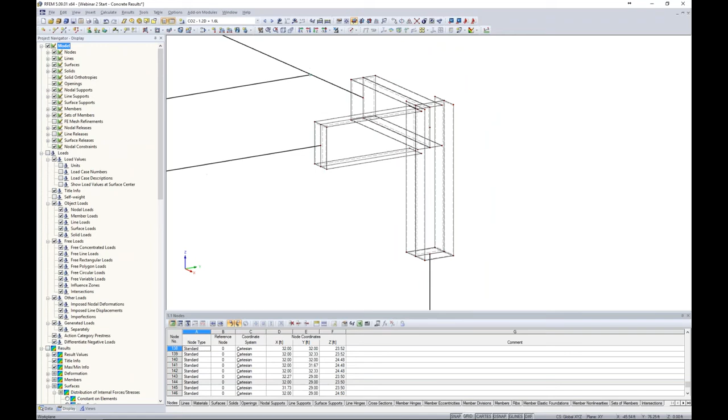We're almost ready to run our analysis, but let's take one final look at our applied loads, and we'll jump to our dead load here to see our applied loads. Now these are member loads applied in kips per foot along our various steel members, but we no longer have members, so we lost those applied loads.

Well, in a similar sense, we can apply the same load magnitude, but this time as a new line load. Line loads are applicable for something like a surface, for example, where we don't have a member available. We apply it in the global Z direction with a magnitude of -1.1 kips per foot. I can scroll in here, apply that to the top of this beam, and you can see it transitions quite nicely from our beam to our surface element.

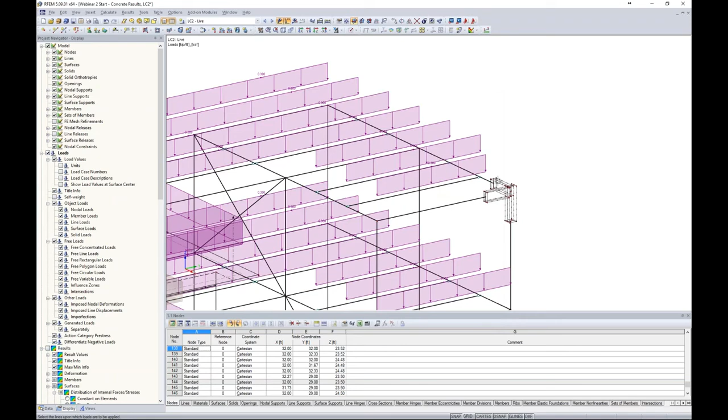Now the same thing can be done for our live load. We'll apply a new line load here, but this time we want to give it a new load magnitude of 0.3 kips per foot. I click OK, and then I can apply that to the top of this beam.

So now we can run our first load combination. Here I'll just apply the 1.2 dead plus 1.6 live. We can run our analysis. Now keep in mind this will take just a split second longer because we've now introduced these new finite elements for this connection into the program. As you can see, it still solves rather quick.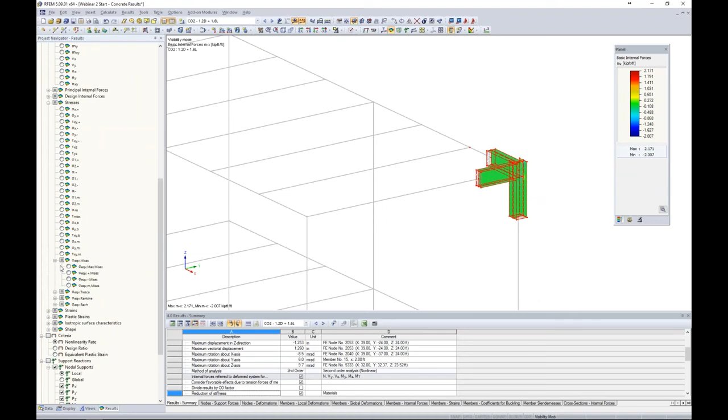Now you'll notice that the program is smoothing all of these internal forces together, and that's just so we can have a nice pretty picture of what's going on with our connection. But in reality, this isn't a correct way to view our results. So it's so important with any finite element software that we pay careful attention to how we're viewing these results, such as stresses on our surface elements.

Now again, with my AISC Advanced Steel Design webinar, I did an entire hour dedicated to a connection just like this, and I go into much more detail, but obviously we're almost out of time today. So the only thing I want to show you is that rather than tying it together with this smoothing algorithm, we'd rather view our results here under our display tab in our project navigator.

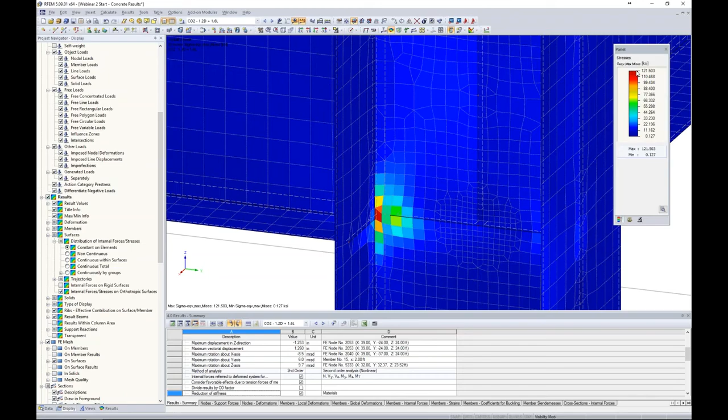Under surfaces, the distribution of internal forces and stresses, we'll view this as constant on elements. So now each particular FE element has its own contour, and we're not trying to tie those together, and our stresses went down from 160 to 121. They're still high, but you can see what a difference that makes. So now that we still have extremely high stresses, I think we're all in agreement that this is much beyond the yield strength that this connection type can handle.

So maybe real quickly, we'd like to utilize the nonlinear capabilities within the program, such as a plastic design. So what I can do is select all of my surfaces here, and right-click to edit them. Currently, I'm just using the Steel A992 defined within the program—that's what all my steel members are designed for right now. But I'm going to create a new material.

I'm going to go to my material database again, which we covered in webinar 1. I'll activate my favorites group to select Steel A992. I still want all those same properties, but for my material model I'm going to choose isotropic plastic 2D/3D, which allows us to do a plastic analysis within the program.

We can get into some very complicated details here, such as tearing and yielding, and we can change our strain hardening modulus. For this example, our yield strength is set to about 50 KSI, and our strain hardening modulus is given as such. I click OK through these dialog boxes, and now I've changed those surface elements to use the isotropic plastic 2D model, while all the rest of my steel elements still use an isotropic linear elastic material model.

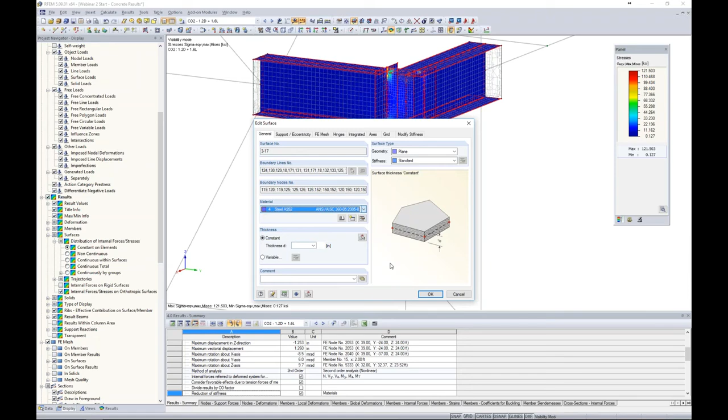Now when I run this exact same load combination, the program will apply these loads to each element within this finite element connection, and the minute it reaches the yield strength of 50 KSI, that load is distributed to the adjacent FE mesh elements. It continues to do so until the load has been fully distributed, so in reality we shouldn't see a single FE mesh element here higher than 50 KSI.

Taking a look at our stresses, that's exactly what's occurring. The highest stress here is 50 KSI before that load is distributed to an adjacent element.

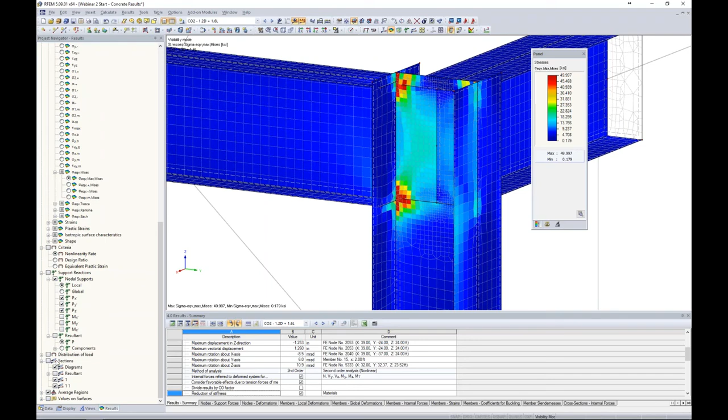We can also now view, under our results tab, an option called Criteria, since we're running a plastic analysis. Criteria shows us the nonlinearity rate of a single element, so you can see exactly which elements are in the fully plastic state or have completely yielded.

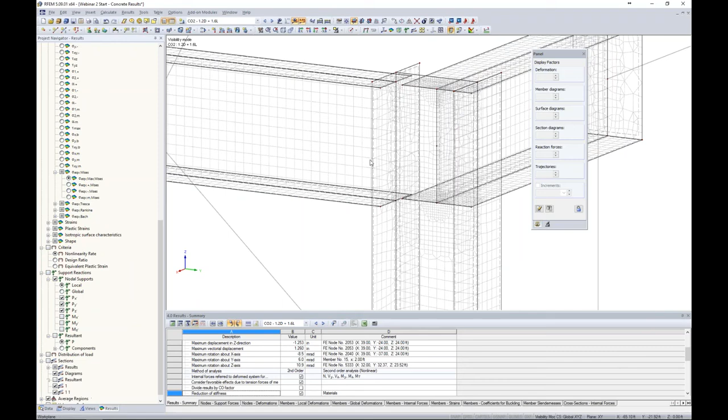So just a little interesting topic, and like I said, my Advanced Steel Design course really goes into much more detail on this if you're interested in something like this connection.

One more quick topic to cover before ending this webinar is a couple of printout report options. The first, which maybe some people didn't know existed in RFEM, is a 3D PDF. For example, let's say I'm interested in quickly printing this connection detail to a 3D PDF. I can either go to File, Print Graphic, or use the quick tool under our toolbar called Print Graphic. We can print directly to a printer, print to our printout report, or print to a 3D PDF.

When I click OK, it just asks me to save it, and I can save it wherever I'd like. Then it automatically launches this 3D PDF based on my structure.

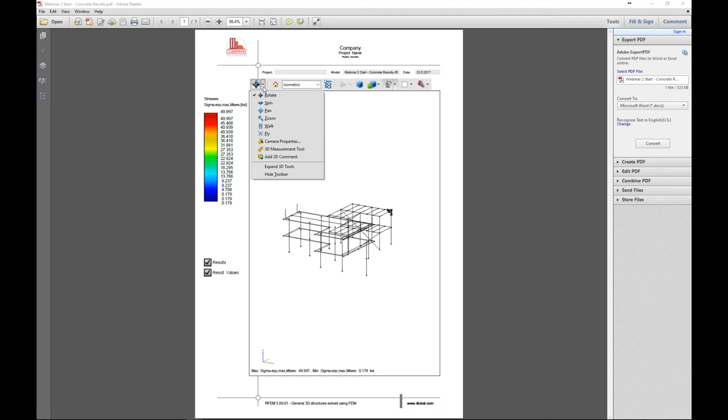Taking a look at this 3D PDF, here's our entire structure, and what's great is that now we can make changes to our view within the actual Adobe PDF program. We can spin it, for example, to take a look at our connection, and use the pan tool to zoom in and really focus on this connection in particular. You can see how beneficial this can be for any type of graphic views in a 3D printout.

And then we can email it, add it to a printout report, or do whatever we'd like with it. Now, the other quick topic to discuss is if we're interested in our results and quickly printing off many load combinations at once.

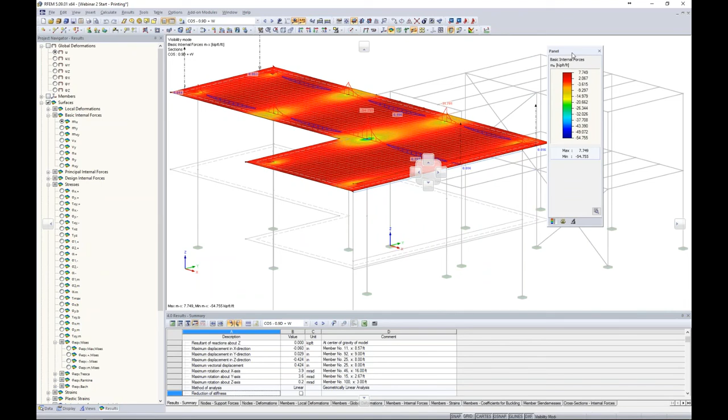So I'm going to jump to an already saved model, back to our concrete slab example. Let's say I'm currently looking at my MX forces of the structure, and I want to look at all the different load combinations and print this off directly to my printout report. Typically I'd have to take a picture of load combination 5, add it to my printout report, change my load combination, take a picture of load combination 6, and add that too. So what features do we have that make our lives a little easier?

Under the Print Graphic report, we have this option here called Mass Print. So I'm going to print to our printout report using the full page width, but maybe I want to use 50% of the height to fit a couple pictures on each page.

Under mass print, this is where all of our model data, loading data, and results data is available. This is basically exactly what we're seeing in our results project navigator. The program assumes we'd like to print off what we're currently viewing, so it's showing MX for my surfaces. Instead of the current load case and combination, I want to print off all load cases and combinations. I click OK, I click OK.

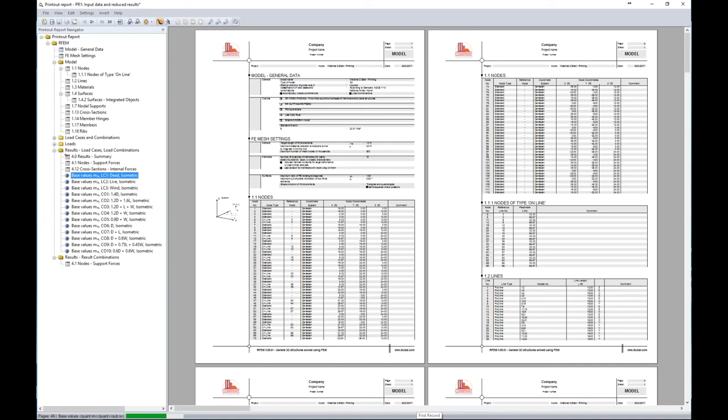Now the program asks me to generate my printout report. I can select one of the saved templates I have. I click OK, and now the program is cycling through all the different load combinations for my particular MX internal forces of my slab, and it's going to automatically add them to my printout report.

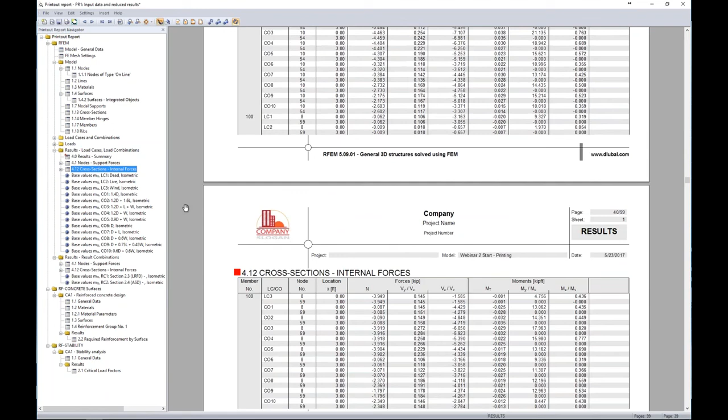Now you can see that we jump directly to where those pictures are added. I can zoom in here to show you exactly what's going on. Here's load case 1, dead load, and my applicable MX forces. Load case 2, and we can get into load combinations 1, 2, and so forth. This can be extremely valuable if we're trying to quickly print off a lot of different load cases or results at once. We can automatically do that.

Keep in mind, you can always right click to edit one of these pictures. If, for example, I don't want to see the FE mesh settings, I can go under display, scroll down to FE mesh, turn that off, click back, and now you'll see that the picture I edited is automatically updated to not show the FE mesh.

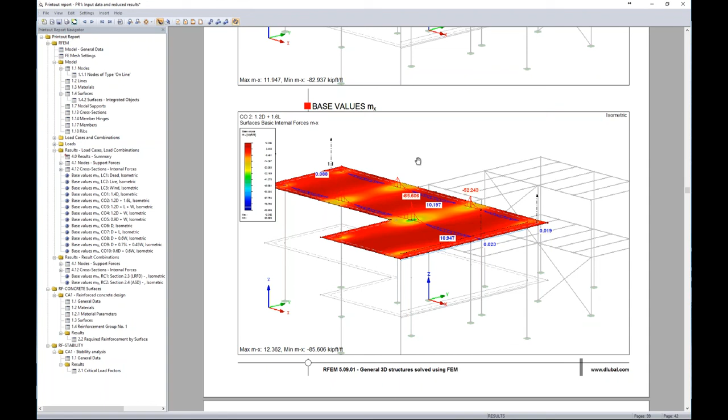Another very powerful feature: if I make any changes to this model, including different loads or different cross sections, all of these pictures will update automatically. So I never have to worry about reprinting all of these pictures. I think our printout report is one of the stronger features of our program, especially compared to what you may currently be using. You can always add your company logo and header, and all of the add-on modules are added to the printout report as well.

If we wanted to switch the order of these, for example, remember running RF Stability at the beginning of the webinar, if we wanted RF Stability in our printout report before our design of RF Concrete Surfaces, all I have to do is select it and drag and drop it, and the program will automatically update the printout report to put RF Stability before RF Concrete Surfaces. So again, just a very powerful feature in terms of our printout report.